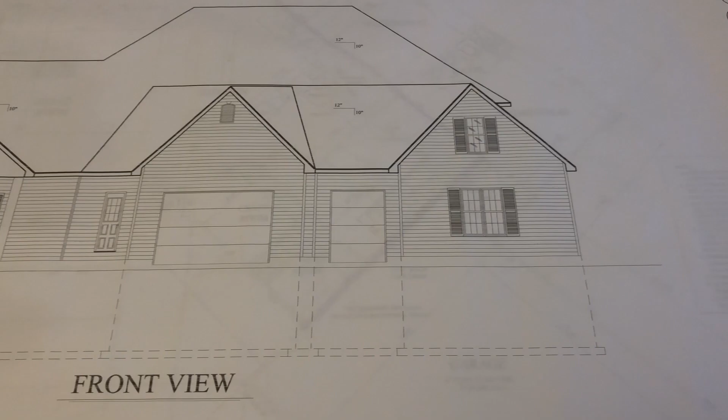This is all about house plans. We have the second draft of our house plans. These house plans are similar to a set we found online, and we decided to go with a local architect here in our area. They came up with a second draft, so here we go.

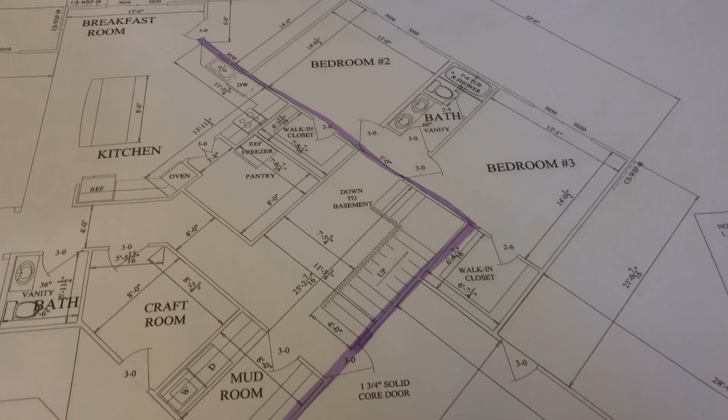I'll briefly explain some of the goals of the house. The biggest goal is that we want it to be off grid. The good thing about going off grid is energy independence from the utilities and the grid, so if the grid goes down, we still have power.

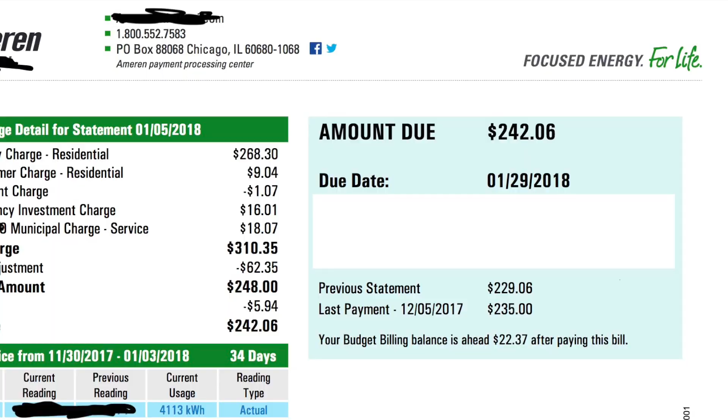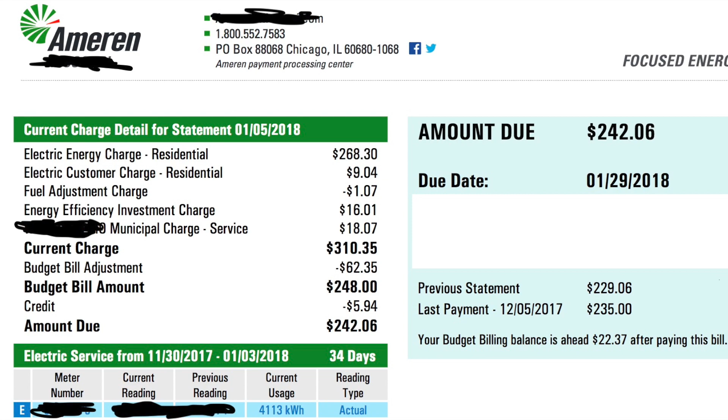Since we are fully reliant on ourselves, we will have to take care of that. Some of the other greatest benefits we're looking at are less service fees, less taxes on the actual costs through the utilities, and more freedom to do what we want with our own property.

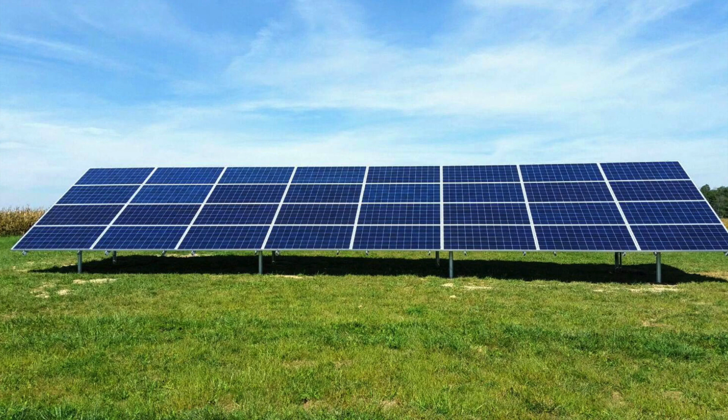Now on to the house plans. One of the things we want to do for the electrical is some form of ground mount solar and a wind generator. The house is actually up on a hill, so that'll give us a fairly good size benefit there.

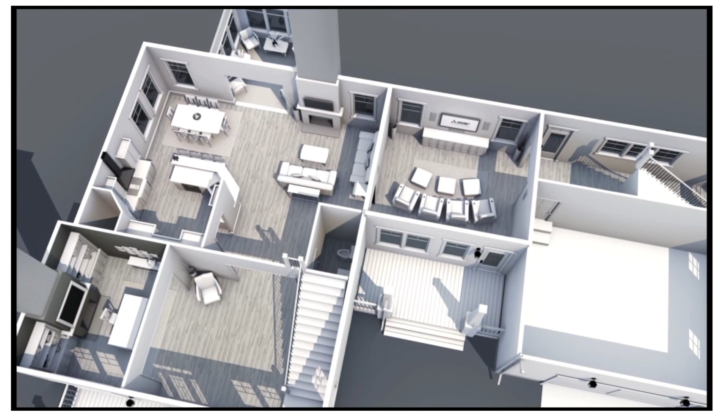We're really looking at doing zones for the heating and cooling. I've done some research on mini split units and heat pumps in specific locations in the house. That's the good thing about zoned heating and cooling units, where you can basically turn on or off specific zones in the house.

Say, for example, the upstairs of this house, we'll be able to shut that off when we're not using it. I have a fairly good size family, so over time we may not need the upstairs. But we're also looking at helping extended family members stay at our house, so that's a good benefit - they can turn the heating and cooling on or off as they need.

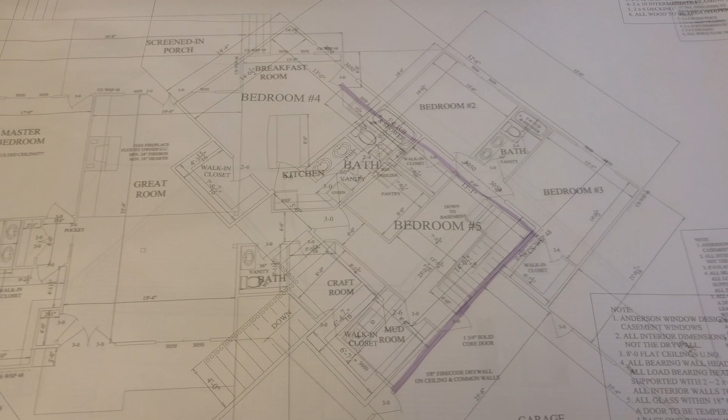Another advantage we're looking at is possibly doing insulation between some of those zones, so we won't have a huge amount of loss between the upstairs and downstairs. If we want to shut off the heating and cooling upstairs, we won't lose much between the first and second floors. It's a smaller second floor, but I think that would be a pretty good plan.

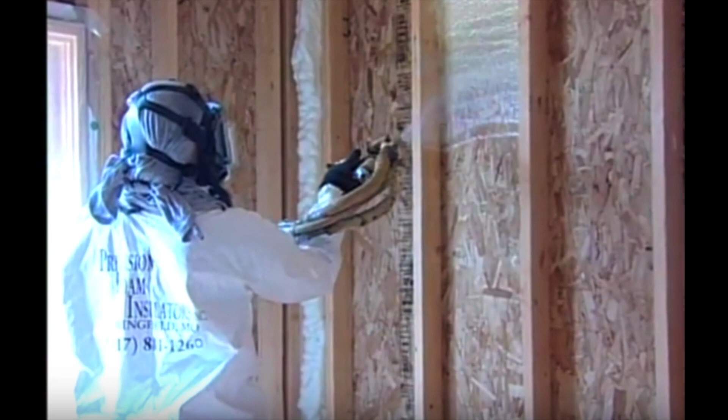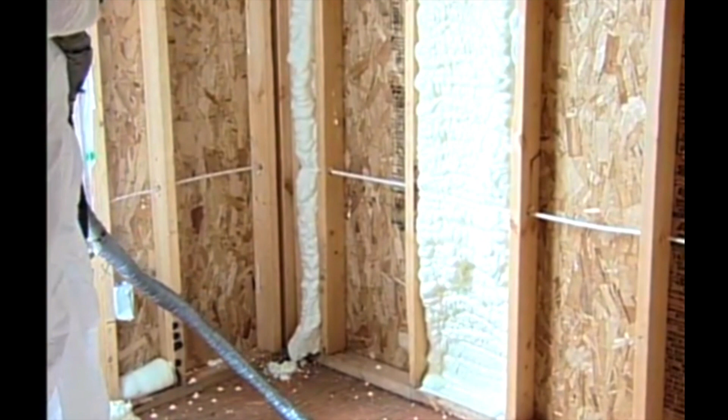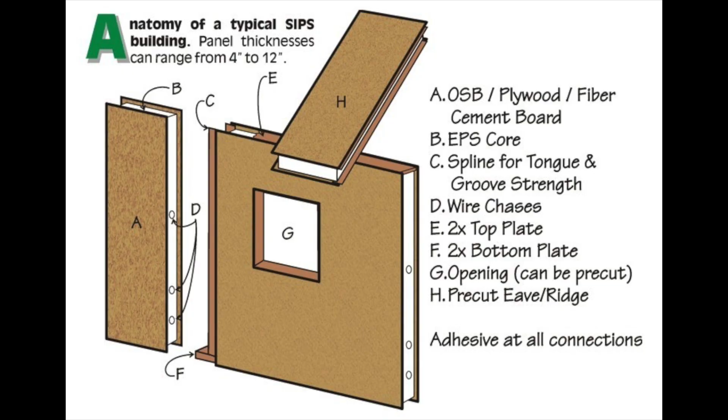Talking about insulation, we're looking at doing some form of spray-in foam insulation, really making sure the insulation has a high R value. Doing some of these things myself, such as the insulation, making sure we're efficient, is probably doing some form of blower test. One other possibility is using SIPs, or structural insulated panels.

The thing is, the house plans we have set up are more or less designed for stick built. I don't know a huge amount about SIPs yet. I don't know if I can just take these house plans and send them to a SIPs manufacturing company and see if I can do a SIPs built home equivalent to it.

It would be great if other people in the community know that, or if I'd have to redesign the house plans just for a SIPs type of home. The architect we're using right now doesn't necessarily know too much about SIPs built homes, so we're kind of at a disadvantage there.

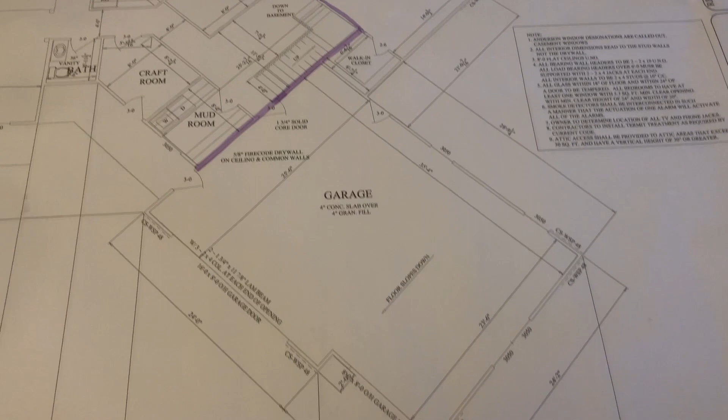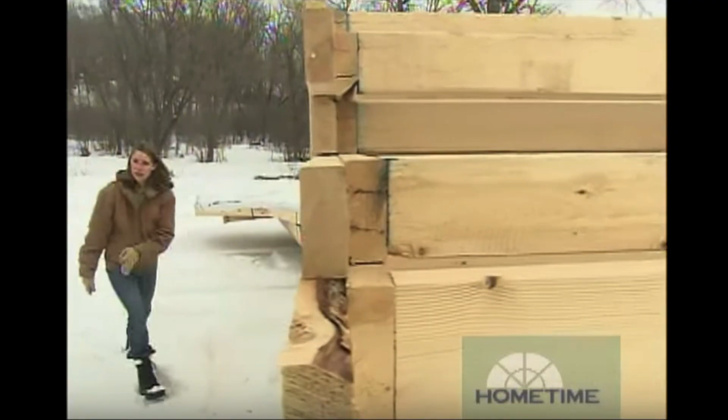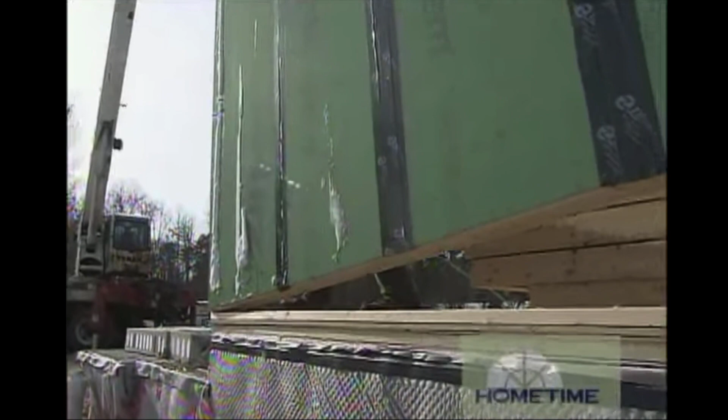Now on to construction. We're looking at doing a stick built home, like I said, maybe using SIPs construction. Another possibility I'm looking at is hiring a company that just builds the entire frame or structure, the stick-built structure, and ships it on a semi truck and delivers it to your site.

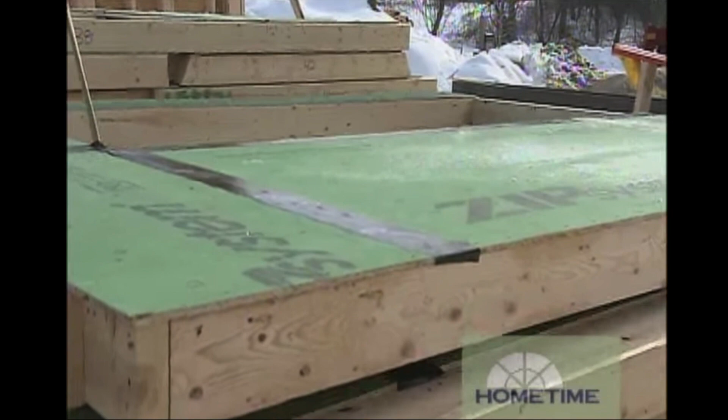I may try to do that just so I can possibly do a little more work, framing it up with a couple family members. Another efficiency we're looking at doing is some form of whole house fans where we can suck in the nice cooler air at night - a great way to quickly cool your home without having to run air conditioning.

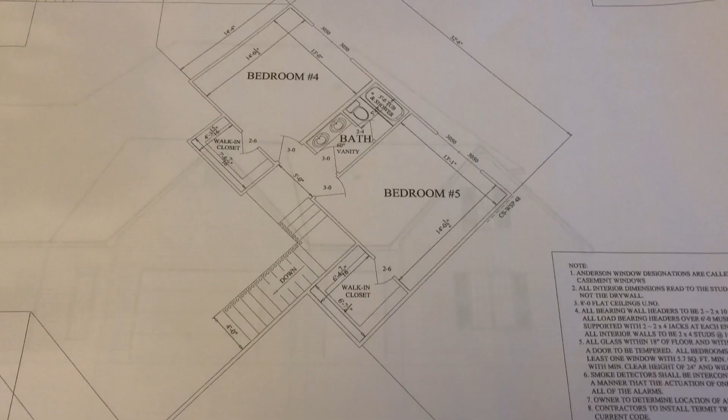Now on to DIY type stuff. We are looking at doing probably about 80% of the build. I would like to pull that off just so I can reduce the amount of labor cost so I can build a slightly bigger home and also provide some awesome videos out there.

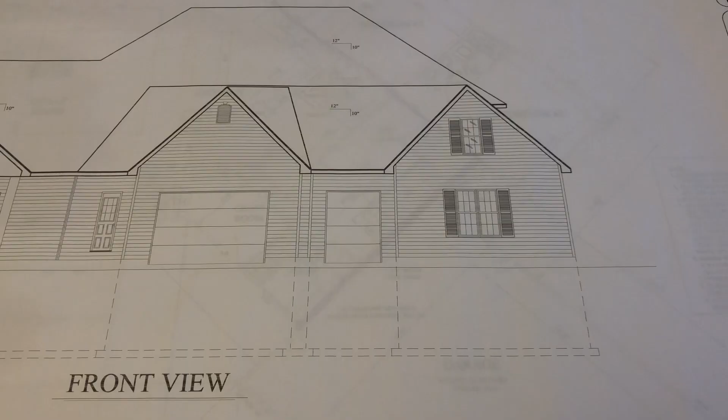Looking at possibly doing the ICF foundation, the actual foundation for the home in ICF. Another thing we're definitely doing is the full electrical of the home, including the solar and wind install. We're looking at doing a solar array mounted on the ground, not on the roof, so I can get a little more solar coverage.

I really would like to use some form of solar tracking. Not sure if that's as efficient - you don't see too many solar tracking installs anymore, but I'll definitely be doing all of the electrical work, including the wiring in the home and the entire solar install and wind install.

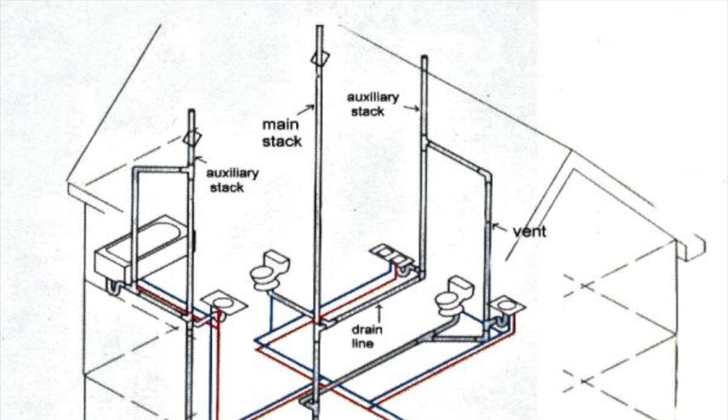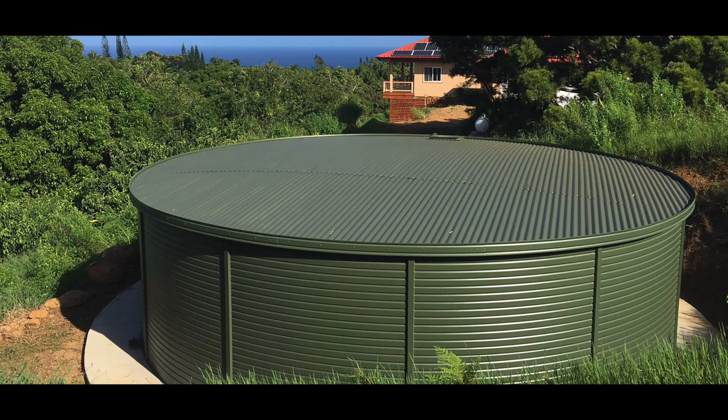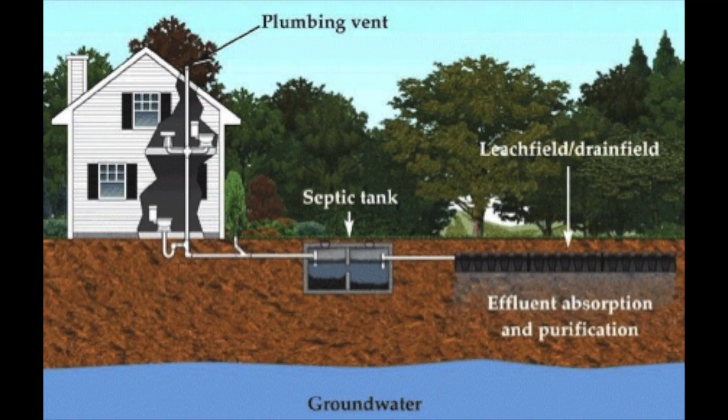Another thing I'll definitely be doing is the plumbing along with water storage, everything dealing with water and plumbing. I don't think I'll be doing the septic system myself - I'll be outsourcing that. So I may even outsource some of the framing.

My biggest reasoning behind that is because I have a full-time job, so I'm looking at doing a lot of this stuff in the evenings and on weekends, and taking a lot of my vacation time off to build some of this house.

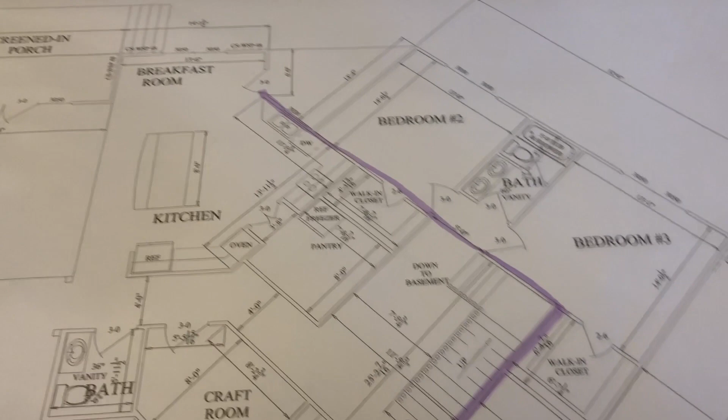Some of the extras about this house plan: since we're looking at helping out extended family, we made some of the rooms more handicap accessible as far as wheelchairs. The doors and hallways are handicap accessible. Well, that pretty much wraps up the house plans video.